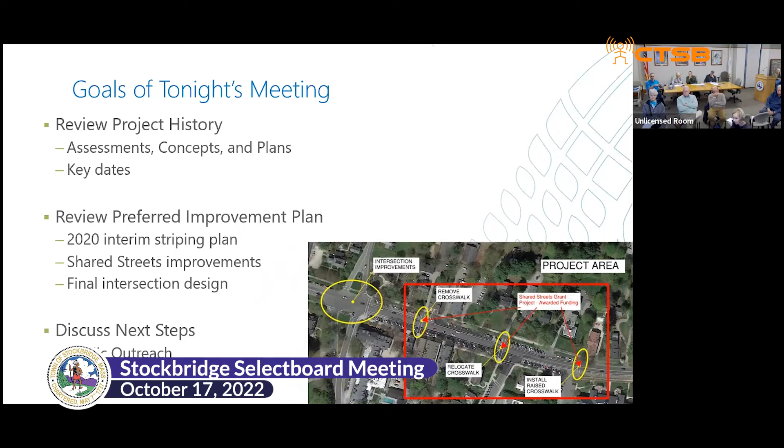What's also happened to date is, I think as most people are aware, we put the paint down to show where the areas would be condensed at the intersection. There's the middle area, which would be a raised mountable pavement, something you'd feel in your car, to get people—that includes a road diet where the road itself would narrow in order for traffic to go there. So that's been installed, looked at, and now we're in the public outreach phase before we take the concept to town meeting.

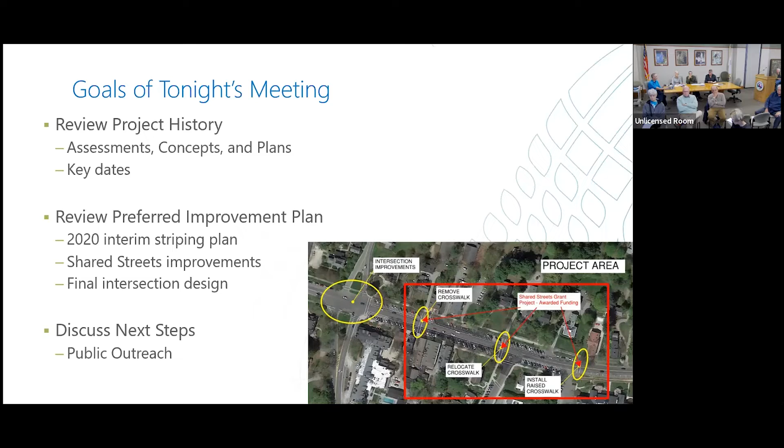And Michael, just for clarification, shared streets is what he's referring to in terms of the grant for the crosswalks. Yeah, that was shared streets, a state—so the Commonwealth—grant making program. Was it through the Department of Transportation? Yeah, through Mass.

So right now, that's the existing conditions of the downtown and the intersection. One of the things that's been brought up is that the intersection of Main Street has a lot of pavement. You can see by the size of the cars in that area how much actual pavement there is.

Which tends to lead to faster cars and other issues. That's why you'll probably hear a term referred to as a road diet, where the road gets narrowed so that people tend to drive a little slower, a little more cautiously.

So they've done the following: they've done a planning traffic study, reviewed the crash data, performed field surveys, developed various concepts that were brought forward, identified the preferred alternative, which will be the focus of tonight, and implemented the interim striping improvements.

We've initiated the state highway coordination through what's called an access permit. Now we'll move on to develop the final plans for the preferred alternative and then pursue a shared streets grant, which was already awarded. So that one we've already done.

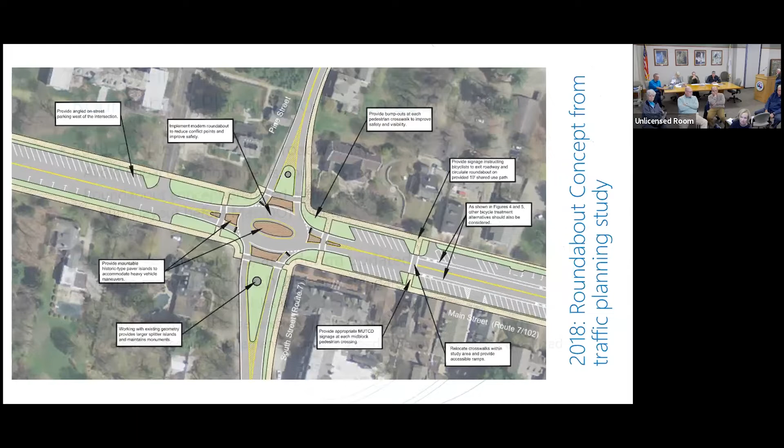And what is deflection on the bottom part? Deflection of entering vehicles, what is deflection? So that's why you see in this next one - I know from discussion - see how the intersection's pushed over? As you come into the intersection, that's deflection, so they can't just do a right turn when going into a rotary. The rotary has to be able to flow. So it creates that shift - you can see how the whole road gets shifted on this map and ends up cutting through properties and other stuff.

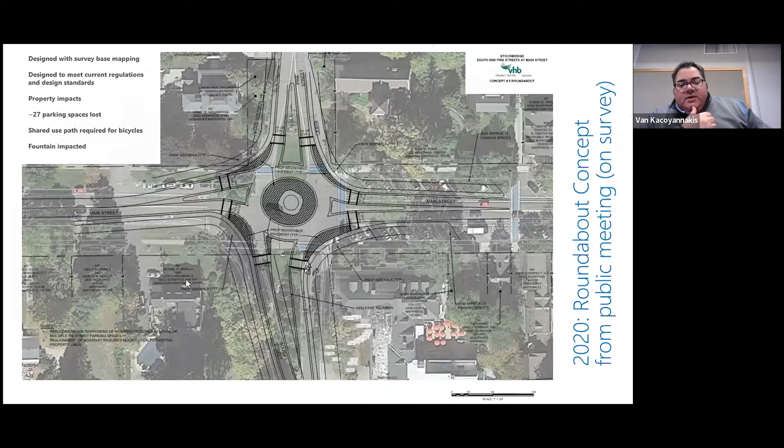Can you go back to the original, the one from 2018? I'm not 100% sure what was said when we connected on this, but if you look at driving on Main Street, either east to west or west to east, there's very little deflection in this design or concept. The concept was trying to fit everything in the right of way, so we weren't taking any right of way acquisitions.

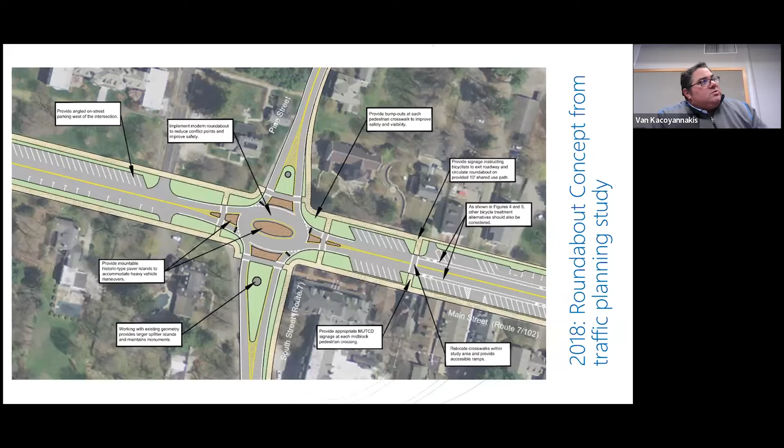But at the time, there were some design changes that require more deflection in the roundabout. If you go to the next slide, you can see that, and Michael explained it, that the entrances to the roundabout, in any of these cases—north, south, east, or west—it pushes the road a little bit and gives it more deflection for the vehicle entering. So they're not making that straight movement, they're actually going around a circle, turning a little bit.

It's slowing them down. If there was a vehicle there and they were to crash, it's not an abrupt T-bone like you'd have at a traffic signal. It's more of a side swipe type of crash, nowhere near as severe as at a signal. This deflection really slows down the vehicles, so it provides some safety.

But at the same time, this deflection takes out 27 parking spaces. There's going to be impacts to the fountain, to the monuments in the islands. You still have to fit in shared use paths for bicycles. There's property impacts on 1, 2, 3 of the 4 corners. So it does provide a little bit more safety, but it has a lot of impacts—to the parking, and to 3 of the 4 properties surrounding it.

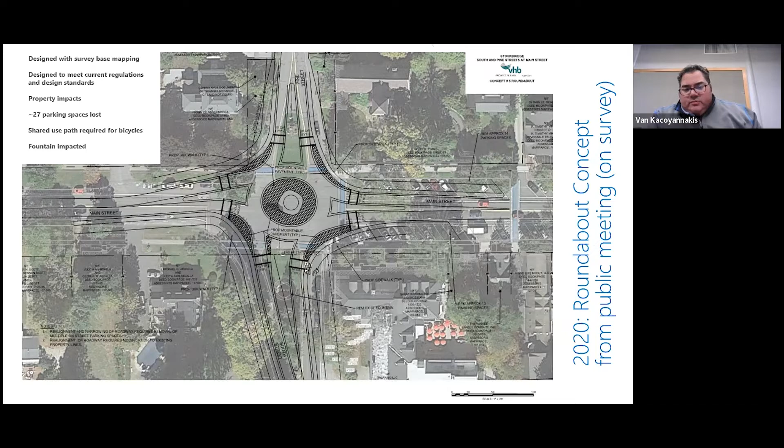So if we can go back, I just wanted to hit on a few of those points. Now let's look at the preferred striping, the interim striping plan that was put in place in 2020. This is what's in the field today, at the intersection now.

You have some island striping that pushes the islands out into the intersection, narrowing down that wide, expansive amount of pavement. It provides bicycle lanes going through the intersection, and an island for vehicles to maneuver around, so they're not making abrupt turns—say heading northbound on South Street and making a left, you can't cut across the whole intersection now. Following the pavement markings, you make a slower turn, then head westerly down Main Street, or vice versa on Pine Street, or Main Street to South Street.

So it really compacts the intersection, and it tries to channelize the vehicles making their left or right turns.

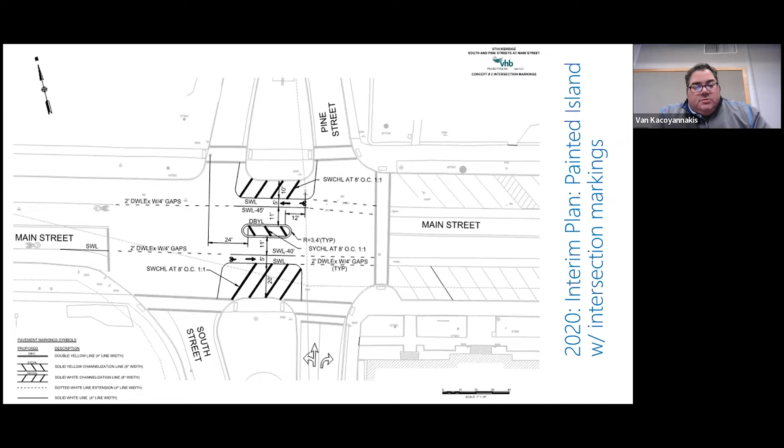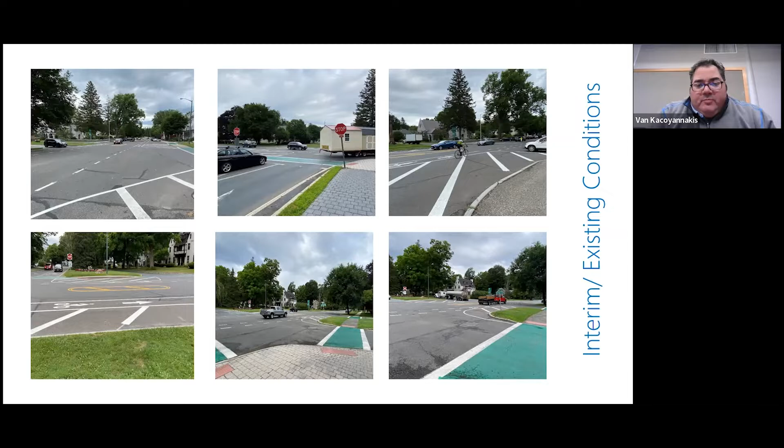If you go to the next slide, these are just pictures of what's in the field today, demonstrating what's out there from our plan. What's nice is you have a bicyclist actually using the bike lane—that's good to see. It shows how in each of the pictures the intersection itself is compacted a little bit, so there's not that large width of pavement for vehicles to go in any direction.

Next slide. The preferred improvements for the current project include the intersection improvements we'll go over, and there's also a grant project where we're going to be removing a crosswalk, moving a crosswalk, and then raising a crosswalk. So it's a raised crosswalk, almost like a speed hump, that'll be in front of the town hall.

Next slide. For the intersection traffic calming at the project area, we're going to narrow the pavement, extend the curb, replace the interim painted islands with a mountable decorative pavement, reconstruct the crosswalks and pedestrian ramps, provide bicycle lanes, and include conduit and handholes for decorative lighting in the future.

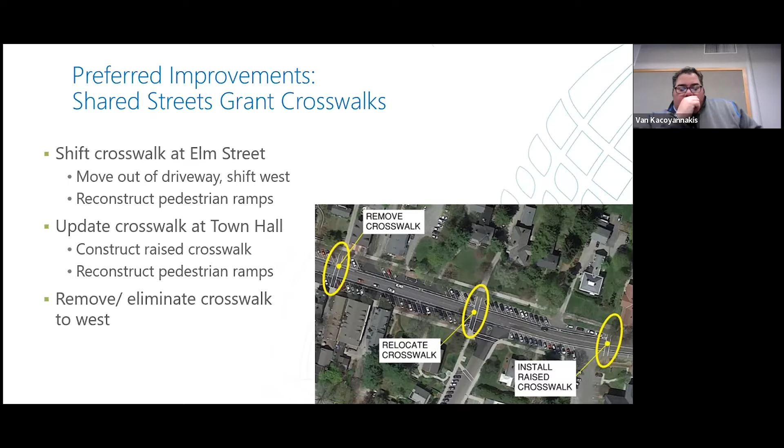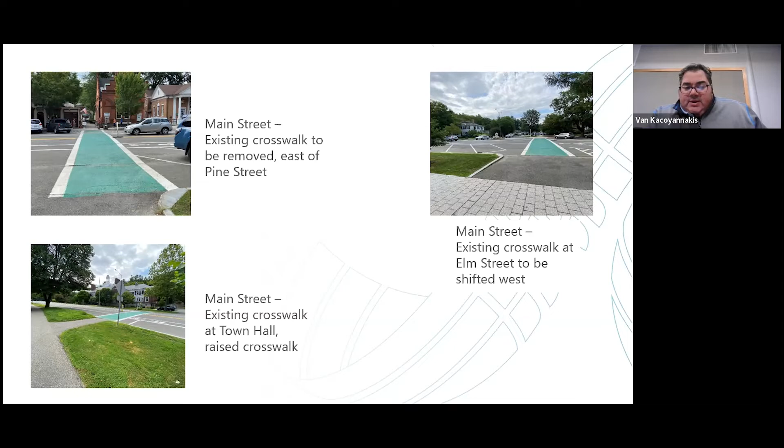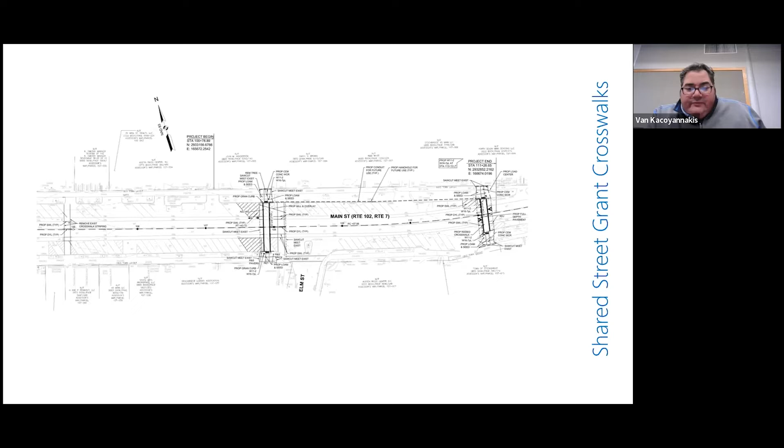And then this is just the drawing that we provided. That's where we're gonna raise the crosswalk, as I said, in front of the town hall, and we're gonna shift it over at Elm Street. It is gonna impact some of the parking spaces there, but overall, you're gonna have a safer crossing for anyone who needs the ADA accessibility.

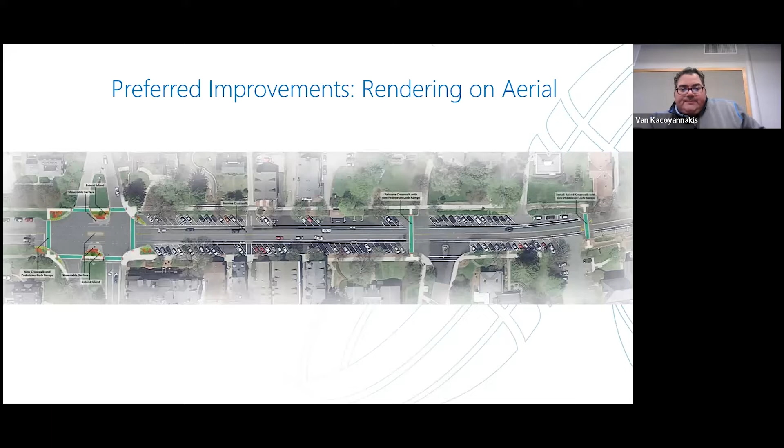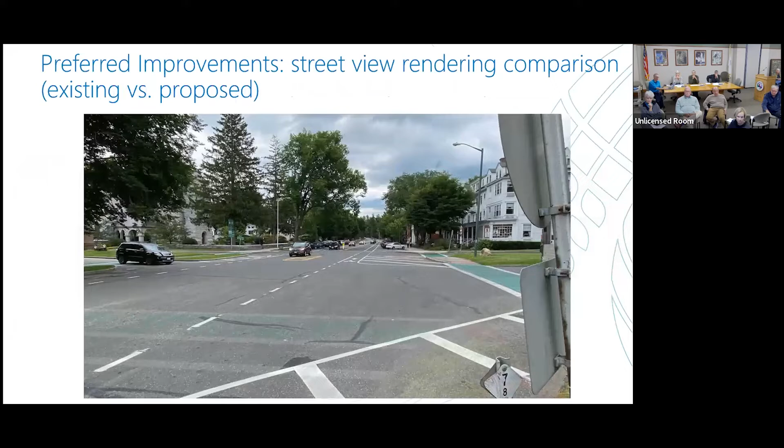So it went rather quickly, but this just shows you how going from the existing condition to the proposed condition, what it's going to look like. It's really not going to impact the overall area. It's going to dress it up a little bit. You could see how that corridor has less pavement now, and it really can help calm the traffic driving through there. And it fits the area.

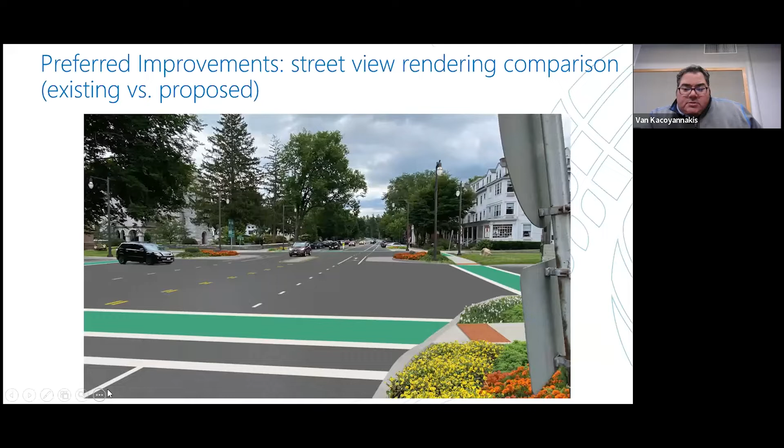So just to go over some anticipated project construction costs, the preferred intersection improvements at Main Street and South and Pine is roughly $550,000. The crosswalk improvement at Main Street, which the town has received a grant for $135,000, is roughly $175,000 in construction costs. In 5 years, the intersection of South and Pine Street at Main Street is going to need regular required maintenance. 5 years from now, that will cost $150,000.

So the preferred option compared to the maintenance is an additional $400,000 rather than it being $550,000, because you're going to have to update this intersection in, like I said, 5 years. And then a roundabout in this area is roughly around $3 million to construct, but that doesn't include property takings, reconstruction of the fountain or other hardscape improvements. And you're still going to have to relocate some of the parking.

Just before you move on, just to be clear, the $150,000 is the cost to do nothing, because the street needs to be paved in the next 5 years. So yes, correct, that's not an addition to the 550. That's going to need to happen anyways. Right.

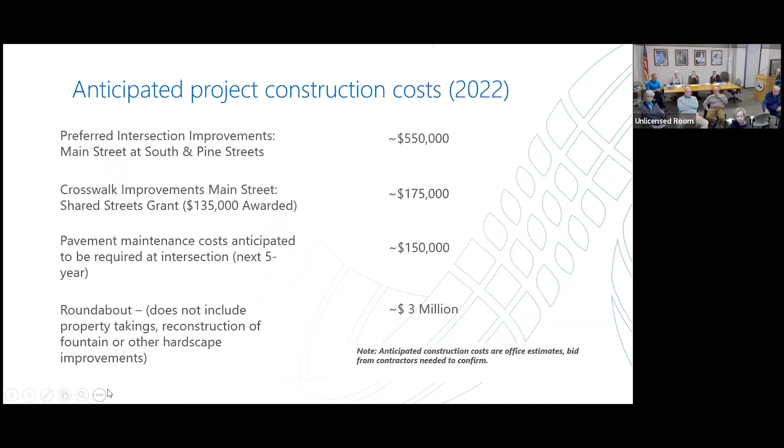Next slide. So the next steps, we're going to prepare bid documents for the shared street grant crosswalks, advertise that project.

Hopefully we'll move forward with a public information meeting in the fall, that's this meeting, but to vote on it.

We're hoping to receive some feedback on tonight's information meeting. There's going to be a handout that's being provided at the meeting tonight.

The maintenance is $150,000 over 5 years. The preferred option is $550,000, and the roundabout is $3 million. We're hoping that we'll be able to evaluate the feedback and then pursue funding and approval at the next town meeting.

All right, so at this point, I do believe that folks should come up and speak at the podium. Introduce yourself or raise your hand on Zoom. Give your name, and you don't have to give your address, but that's fine. Well, some people don't like to do that always, but you're supposed to give your address, though you're not required.

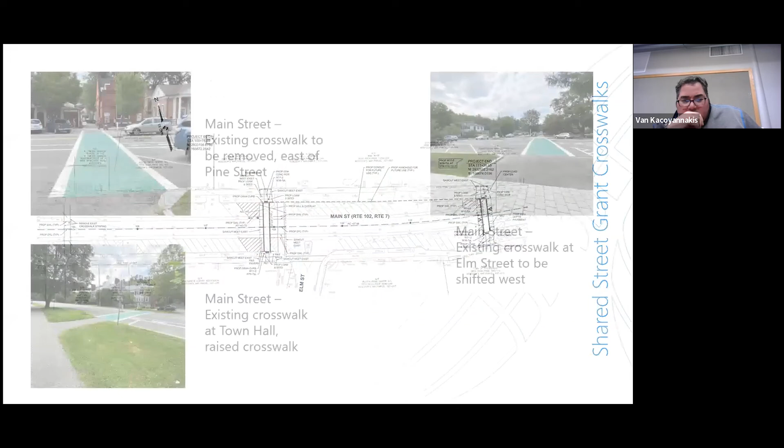If you can go to our plan. So we adjusted this, the southwest corner, a little bit, and we opened this up so they have a little bit more room to swing into the lane going from South Street to Route 7. Can we zoom in a little bit?

We did run truck turning templates over this to see if it would work. So if you could see, this is a little bit more open than what it was before. It should provide enough room for a WB67 to make that turn. There's a lot of truck traffic out here today.

They are running over the actual ramps there are now today. You could see it in the photo.

Yeah, I observed one truck. Actually, I was in that 2018 walk around that Chucky was talking about, and observed one of those logging trucks come up, and he did a smart thing. He pulled over into the left lane to make his turn, and he stayed inside the yellow lines down Main Street. And I just wonder if you should shift those lanes a little bit to the left, to the west, just so they can make that turn. With a 70 to 75-foot trailer coming up there, I just wonder whether we're still going to see traffic being interrupted because they're out in the other lane.

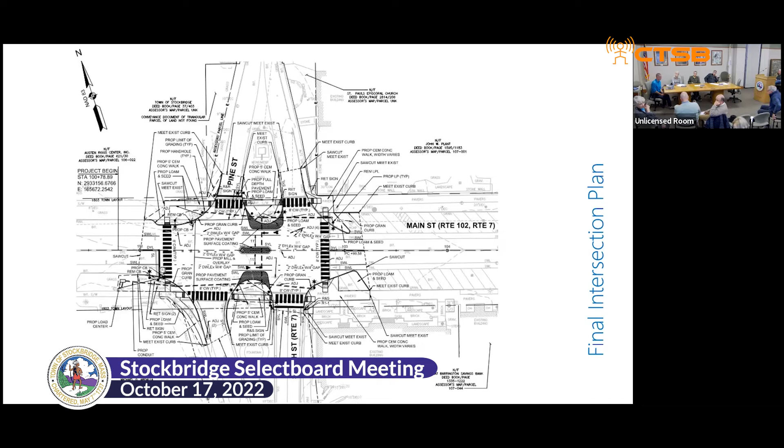We'll definitely relook at the lane lines that are out there. That is state highway. In the drawing there, there's a line going across both approach on South Street, Route 7, and then leaving the intersection, South Street going southbound. There's a line going across, and then from that point down, that is state highway. There's a stop bar there as well. We're trying not to impact too much of the state highway or the island. We don't really want to impact the fountain anymore, but we'll look into seeing if we could provide a little bit more space there. But we did look into improving that corner for truck turning.

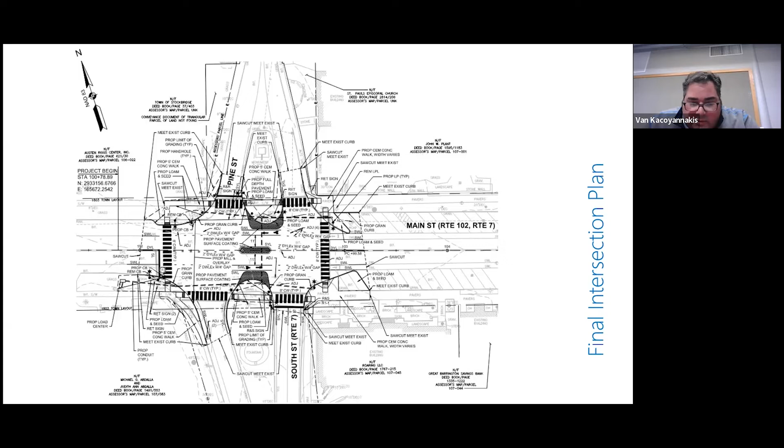Thank you, Keith Raftery. While that's still up, is there a right-hand turn when you're coming west or coming east from the west on Main Street? Yeah, but it doesn't look like there will be, because there's not one now. No, there isn't. Used to be one.

Yeah, it's really... I'm sorry, Keith is next. Oh, yes, right.

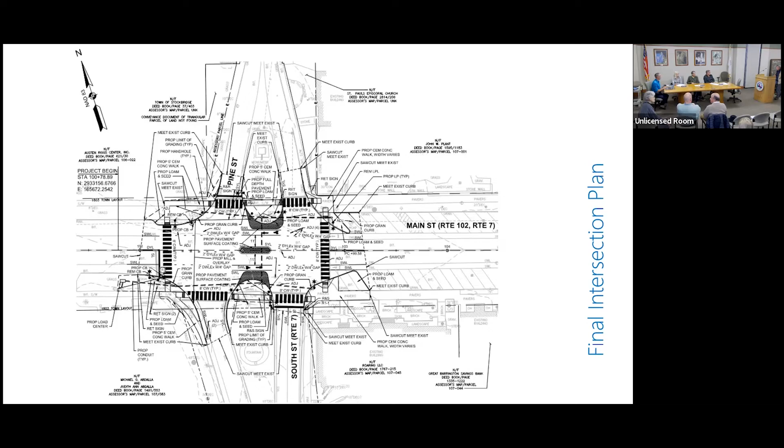Good evening, Keith Raftery, 40 East Street. To back up what Roxanne said and what Ron was mentioning about signage around there, every one of us uses our GPS, not in Stockbridge because we know where we're going. But we have to look out for people coming from outside that don't know where they're going. Just like we use our GPS when we go to Springfield or Boston. And if we took a picture from our GPS of going into the intersection from Great Barrington, coming in from West Stockbridge and made our signage look just like what the GPS is showing you, that would take a lot of confusion out of how you get through that intersection.

And even change the green signs up to say Lee, Lenox, West Stockbridge. Their GPSs don't care that they're going to Stockbridge. Their GPS wants to know they're on Route 7, they want to take a right, or they want to take a left to go south, to 102. So make it look just like your GPS looks.

Thank you. Thanks, Keith. Patrick, I wasn't sure if Bromley was done. He still has his hand up. Oh, Bromley, you got more? I have one more quick comment. I'm sorry about that.

I was wondering if the engineers might consider changing all the stop signs to yield signs, since almost everyone in town and visitors don't stop, they just yield on the turn. So perhaps we ought to get rid of the stop signs and just help people yield. It'll be more like a rotary. We're already trained for a rotary.

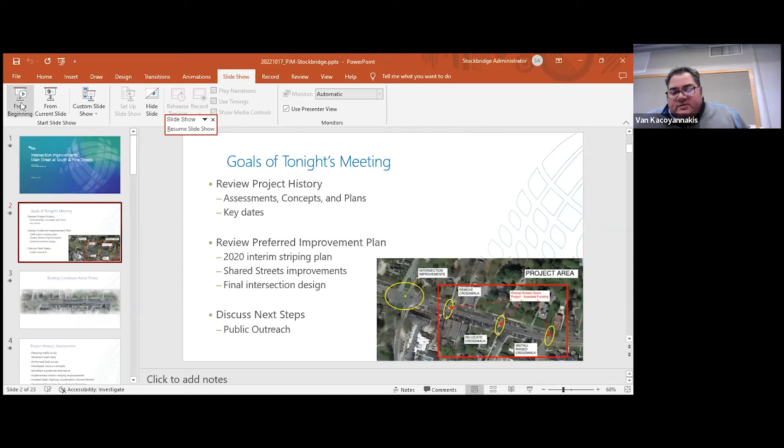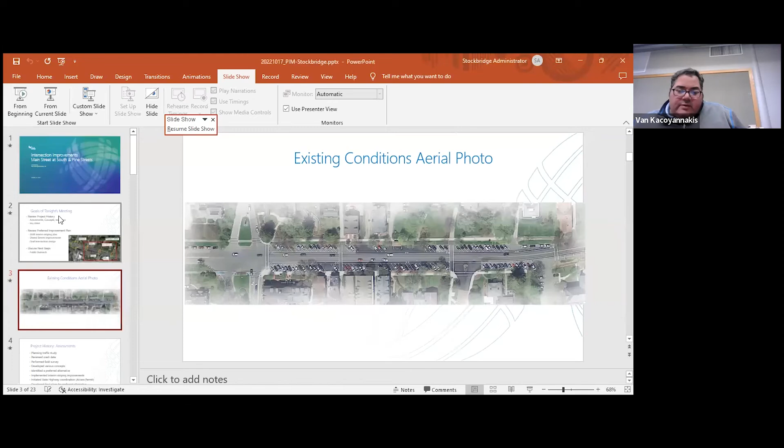So Van, what I was getting at was that crosswalk is being removed, but on both sides of it we're providing a raised crosswalk, which is to slow down vehicles traveling through there. So from the west, vehicles coming from the west, going where that crosswalk was, there's going to be a raised crosswalk at Pine and South Street, and then again at the town hall. So those two raised crosswalks there slow down vehicles to 15 to 20 miles per hour. One of the locations from the west is relatively closer than the one that's to the east, but those two raised crosswalks should help out in slowing down traffic through that area.

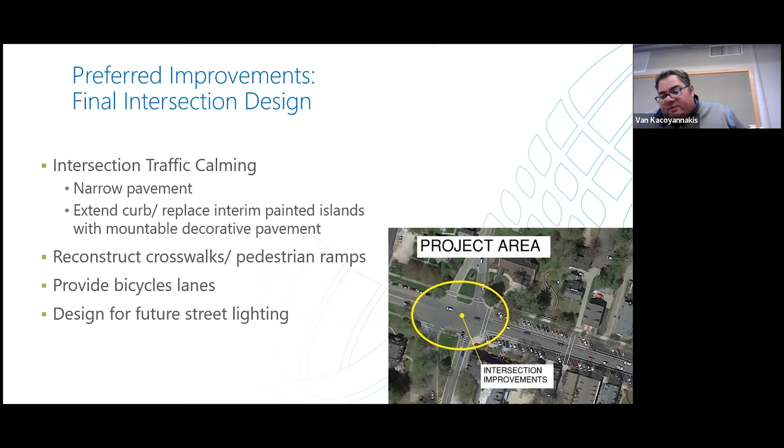So they would, I guess my concern is that traffic from the Red Lion Inn and St. Paul's Church within that main block is going to pick up speed in between those two raised crosswalks, precisely where you want people to slow down, because that's where the bulk of the business district is. And I'd be interested to hear your comment on, I realize there are the two raised crosswalks at either end, but in between those is where the bulk of the business district is. And I would think that we would want traffic to slow down precisely in that area.

Relatively short distance for them to pick up speed in between those two raised crosswalks. And with the amount of parking, angled parking throughout this area, and probably seasonal traffic in the summer months, vehicles, I can't really see picking up speed because one crosswalk's being removed.

We're actually taking the crosswalk along Elm Street and shifting it to the west. So it's not a big shift, but it is actually getting closer to the Pine Street intersection.

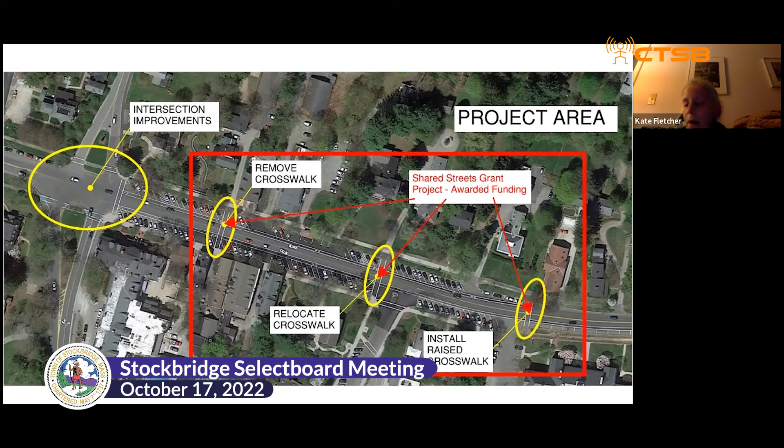It's a little bit hard to hear because they're speaking there, but my comment would be that yes, there is angled parking, but in my experience that traffic can go at a clip in that area. And I think if there's some way to slow down traffic in that main business block, I realize you've got the raised crosswalks at either end, but I think potentially there's still a need to slow traffic down, if there's some way to do that. That would be my vote.

And then the other question I have is, have you looked at having a stop sign by St. Paul's Church as you're heading south? That would back it up. You're referring to eastbound on Main Street? No, I'm talking westbound on Main Street.

East approach. So heading westbound, if that was a four-way stop, one of the concerns would be vehicles backing up between Pine and South and backing up easterly towards Elm Street and further beyond.

So what's wrong with them backing up? I mean, forward. They do now. Look,

I'll just comment. I was walking down Main Street this weekend and the traffic was all backed up and the fumes get pretty strong. And I think keeping that traffic moving is a good idea. I'm no expert, I'm just saying that I really think that when traffic is stalled there, it's problematic for our lungs. Anyways, Kate, do you have any more questions?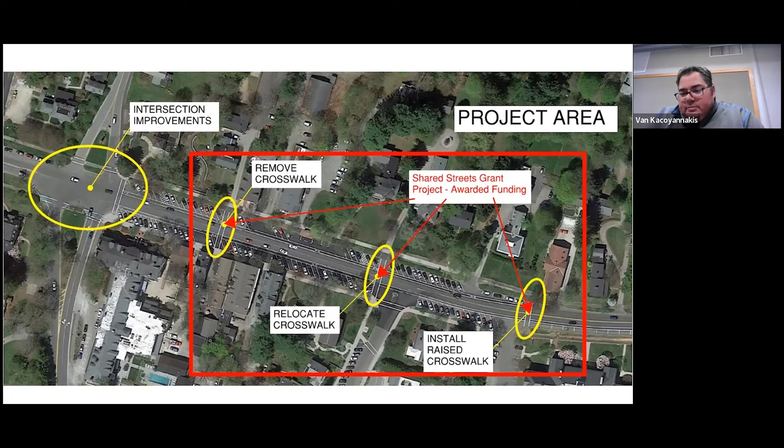My final question is, I see you've got the bump outs you show with plantings. What is the depth of the soil in those bump outs? What we did was we provided areas for planting, and we put in an allowance for the town to come in and do those areas of planting. But typically, loam and seed is 4 inches. It wouldn't be seeded, but it would be 4 inches of loam. That's up to the town when they put in, there's an allowance there for them to come in and do the plantings they would like to do. Okay, all right, thank you.

And then finally, my comment for the select board is that, speaking as a resident, as an individual, I would vote for an incremental approach here. It sounds like there's a grant that has been funded, but I've heard from MassDOT officials that whenever it's a state grant, there are strings attached. And I would be interested to know what's involved with that liability.

And I guess I would prefer an approach that is a little bit more incremental and measured, one step at a time. I think it makes sense to reduce the area at the intersection such that those are focused, using those traffic calming techniques. I do support that approach. But the other part, it seems like it doesn't make sense to me to have a raised crosswalk at the town hall where that's the least used of all the crosswalks, and then to remove the busiest crosswalk.

I have driven out of the parking lot at St. Paul's, and not unlike the intersection, I just drove through that intersection last weekend, the height of leaf season, and there was a well-attended funeral service at St. Paul's that we were going to. And yes, there was some confusion, but what I noticed was people slowed down and sort of looked at one another and made eye contact. There is some of that involved.